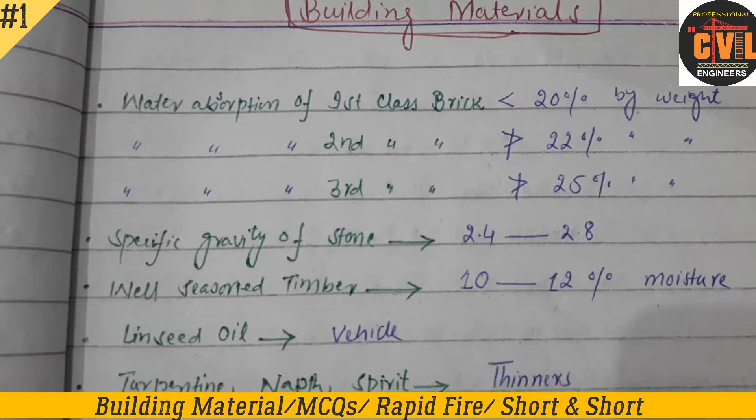I am Engineer Shamsur Rahman, and today I will start the series of test preparation for the examination of Federal Public Service Commission, Punjab Public Service Commission, Khyber Pakhtunkhwa Public Service Commission, and Sindh Public Service Commission. Also important for NTS, ETEA, UTS, ATS.

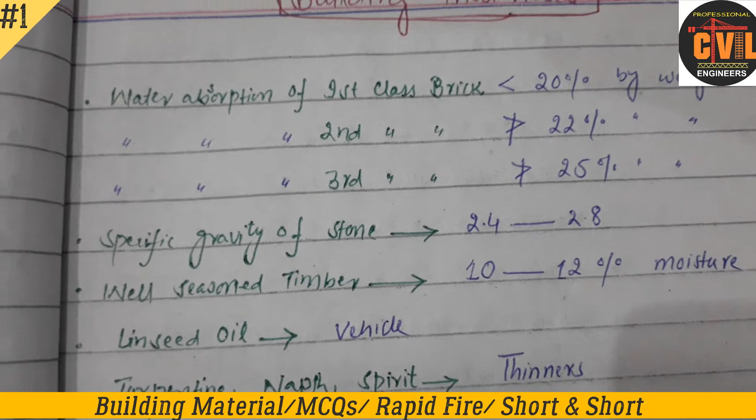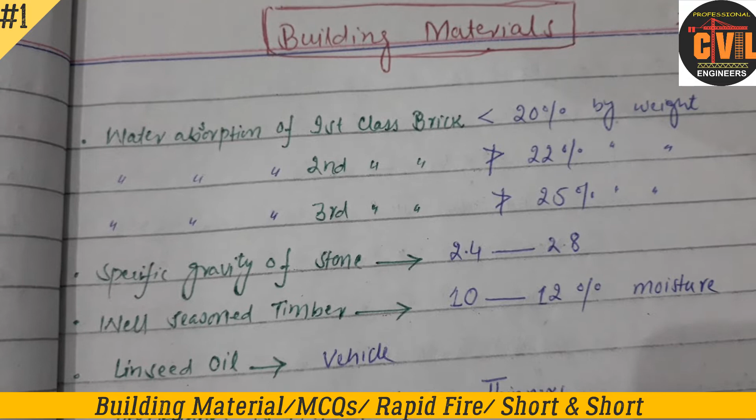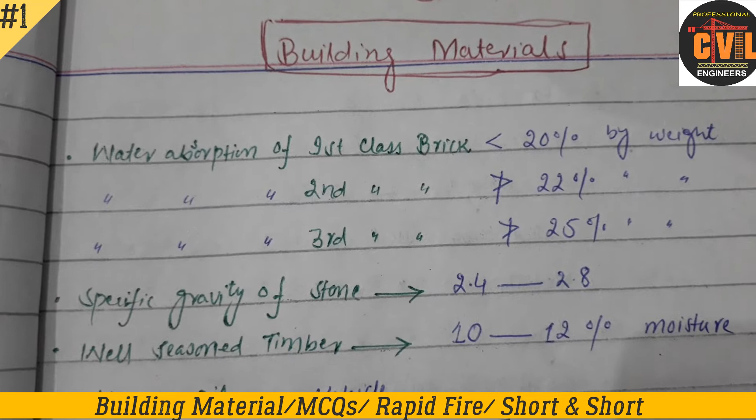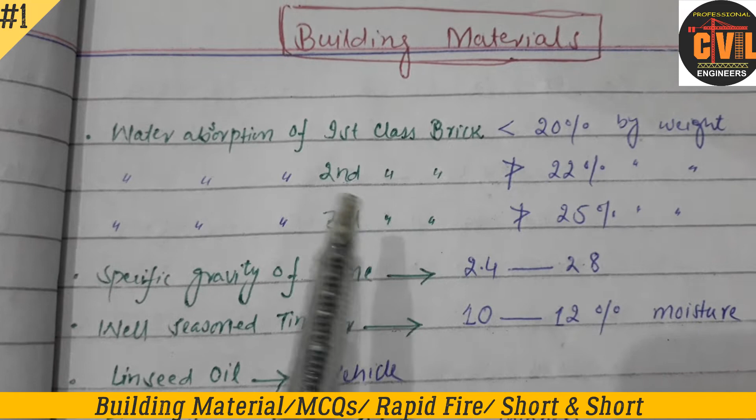Now, water absorption of first class brick should be less than 20% by weight. If you have MCQs asking how much water first class bricks will absorb, the answer is less than 20%. There are three types of bricks: first class, second class, and third class. In first class bricks, water absorption should be less than 20%. In second class bricks, water absorption should not be more than 22%. In third class bricks, water absorption should not be more than 25%.

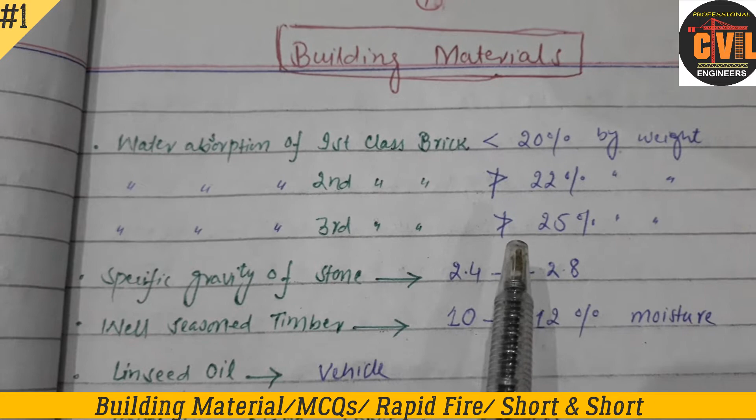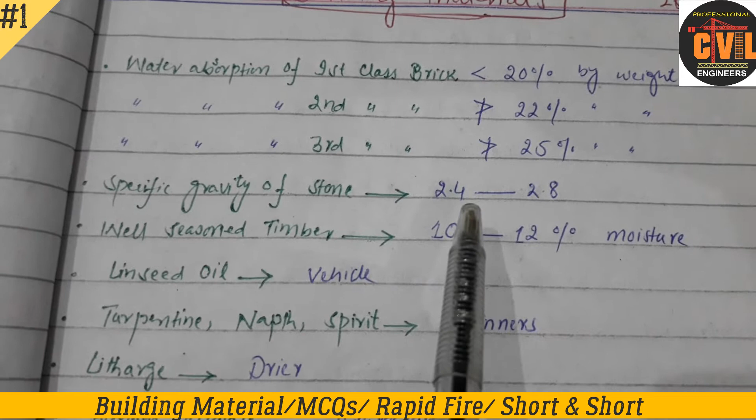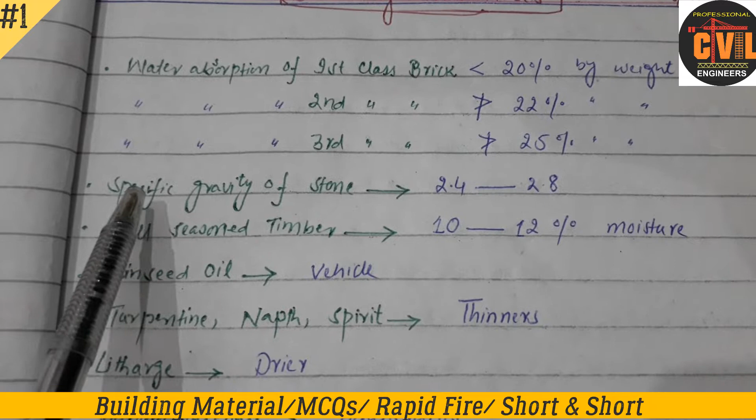Now, specific gravity of stone should be between 2.4 to 2.8. What is specific gravity? Specific gravity is the unit weight of any material divided by the unit weight of water. So specific gravity of good stone would be between 2.4 and 2.8.

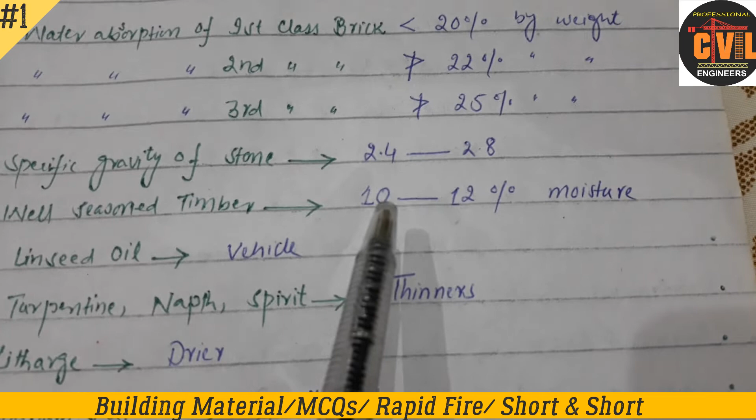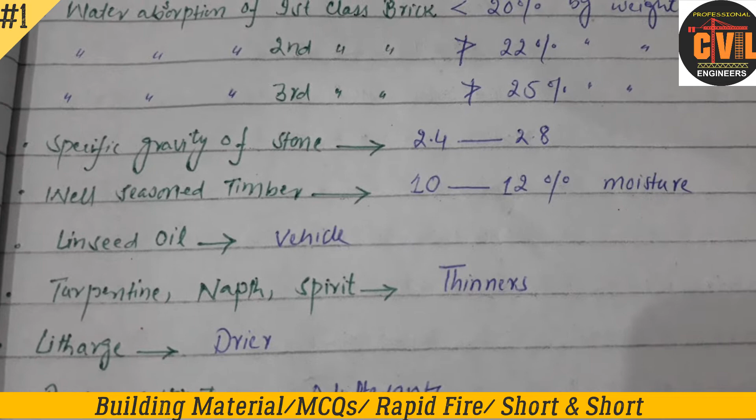Well seasoned timber should have moisture between 10% to 12%. What is seasoning of timber? Seasoning of timber is to remove the moisture from the tree, and if moisture is in the range of 10 to 12%, then it is called well seasoned timber.

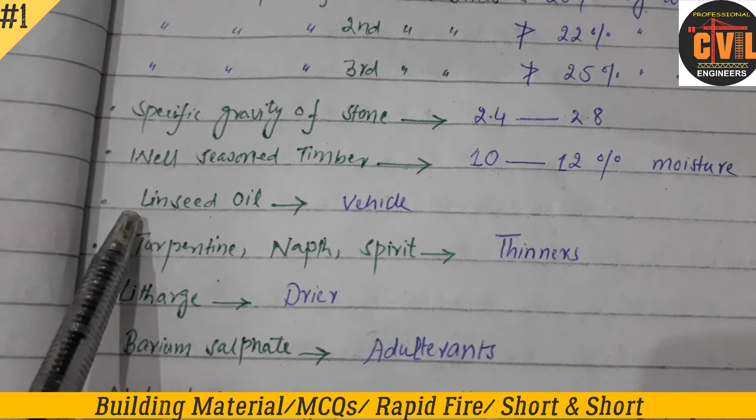In other MCQs you may be asked what linseed oil is - is it vehicle, thinner, dryer, or adulterant? Then you may be asked about turpentine, naphtha, spirit - these are thinners. I will explain what is vehicle, what is thinner, what is dryer, and what is adulterant. Litharge is a dryer, barium sulfate is an adulterant.

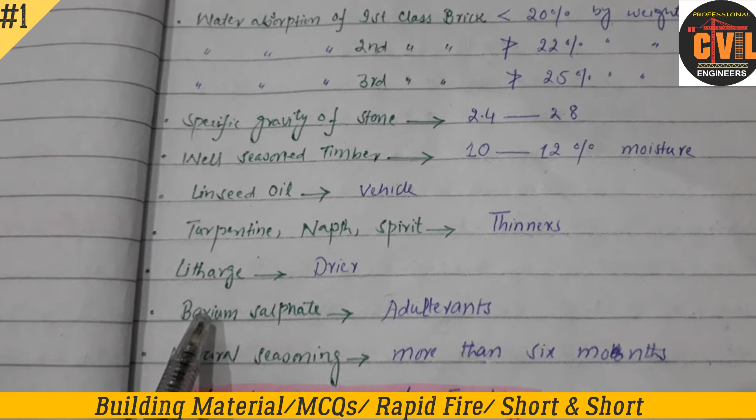Now I will explain what vehicle is. Vehicle is an oily liquid in which the base pigments of paint are soluble. It facilitates the paint to be conveniently spread over the surface by means of a brush.

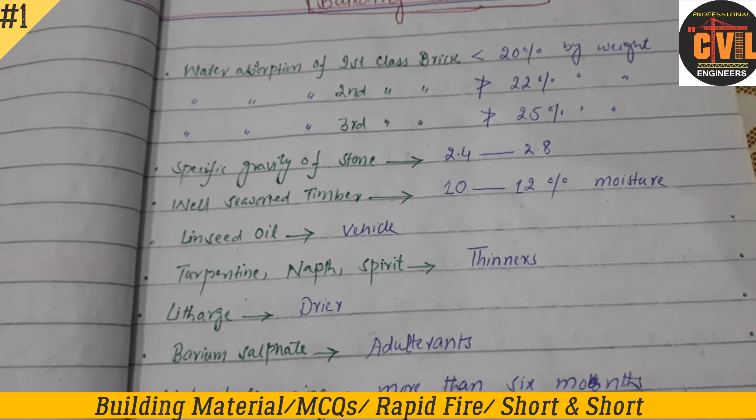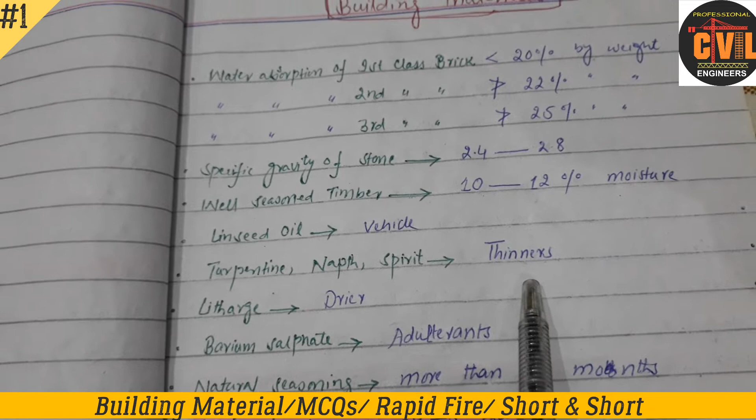Now, what is solvent or thinner? It increases the fluidity of paint to the desired consistency, to make it work more smoothly. Vehicle dissolves the base material of the paint, while thinners just give it fluidity.

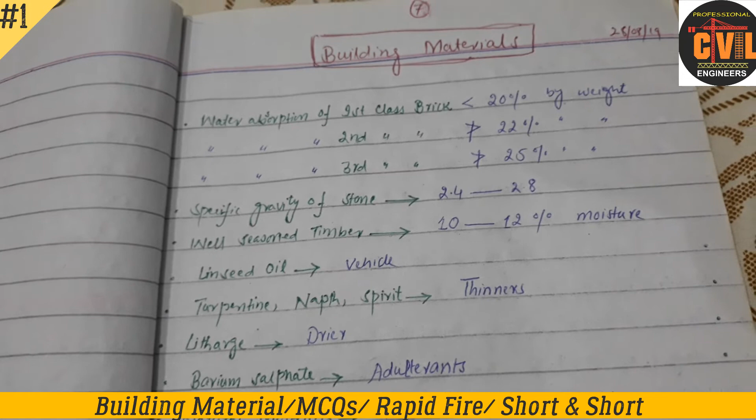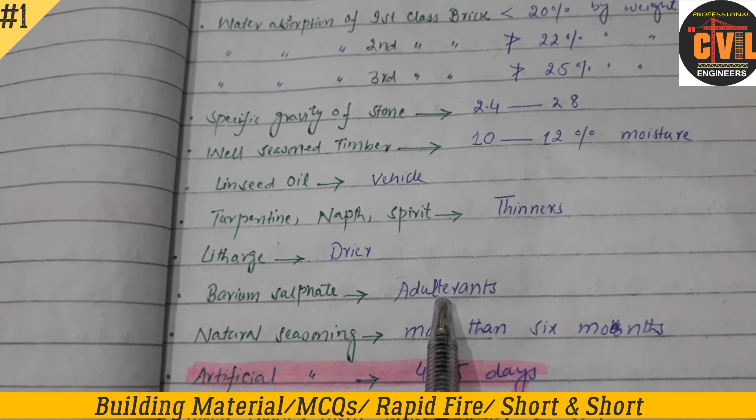What is dryer? Dryer is added to paint to quicken the drying of the vehicle - it reduces the time period of drying of the paint. And adulterants are materials which, when mixed with the paint, replace the base in part, thus reducing the cost of paint.

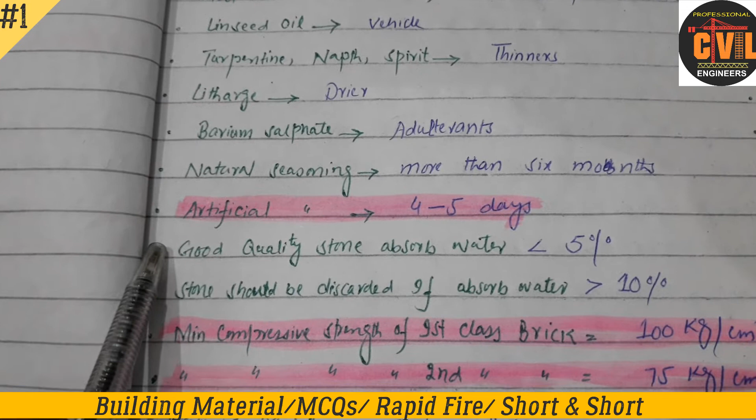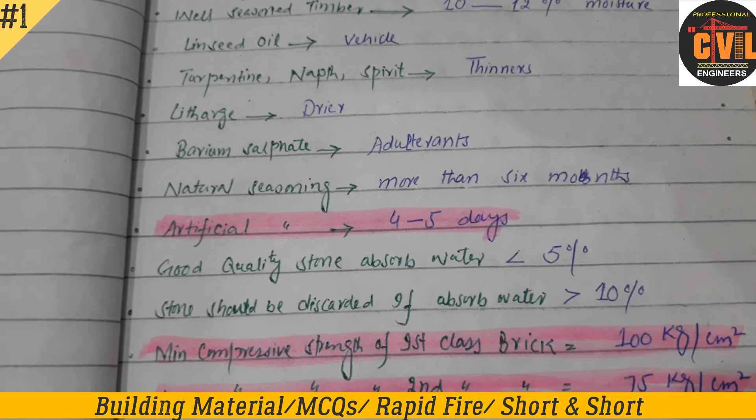As I discussed before, seasoning is to remove the sap or moisture from the fresh fallen tree. There are two types of seasoning: natural seasoning and artificial seasoning. In natural seasoning, you put the timber in shade and let the process happen naturally, which takes more than 6 months.

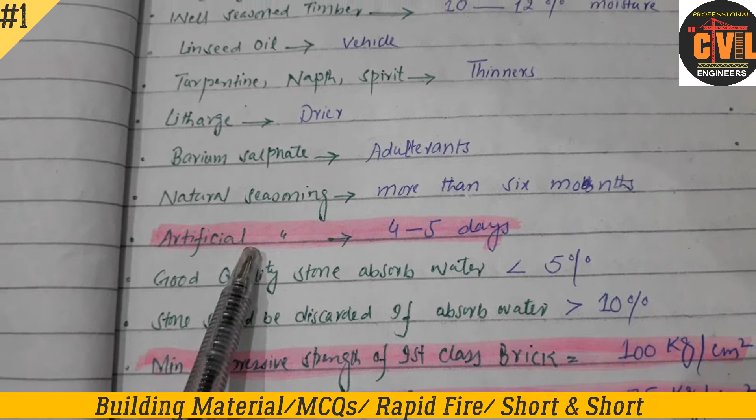In artificial seasoning, you make it by machines, so in this way you can get the seasoning done in 4 to 5 days.

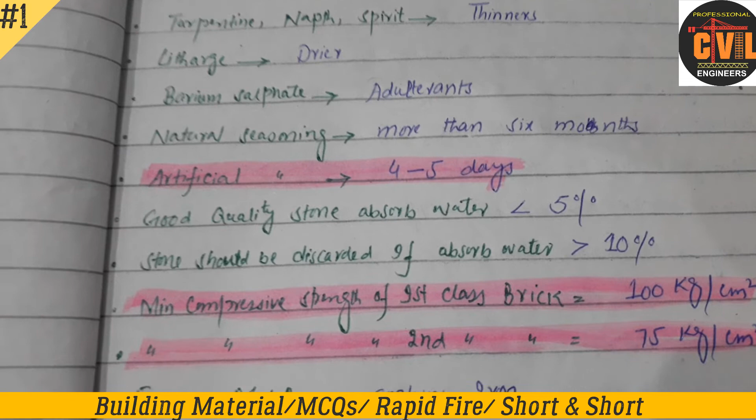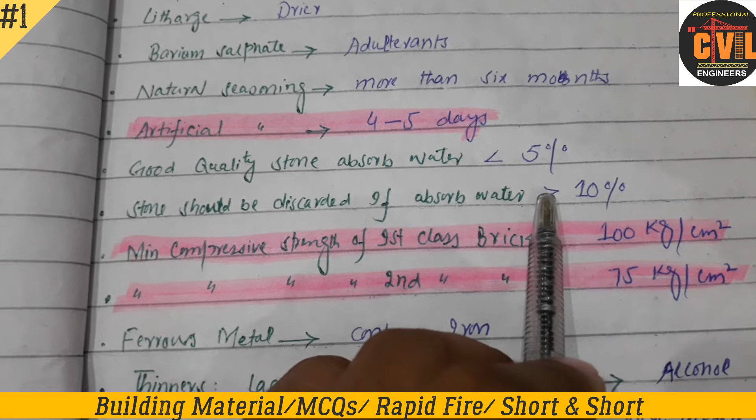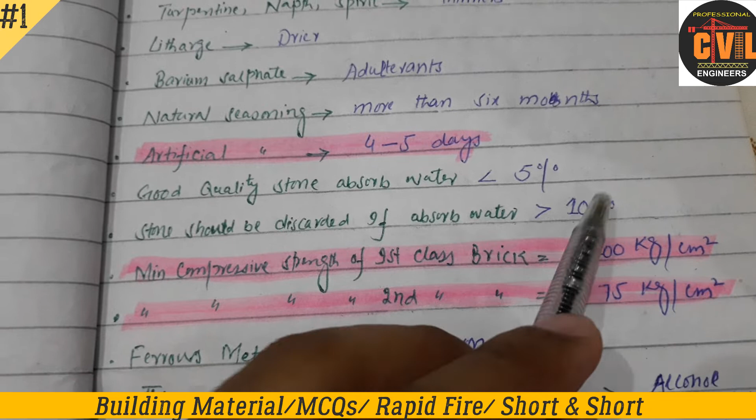Now they can ask you what good quality stone absorbs - how much water. The answer is less than 5%. If it has more than 5% but less than 10%, you can still use this stone. But if the water absorption is more than 10%, then you should discard this stone.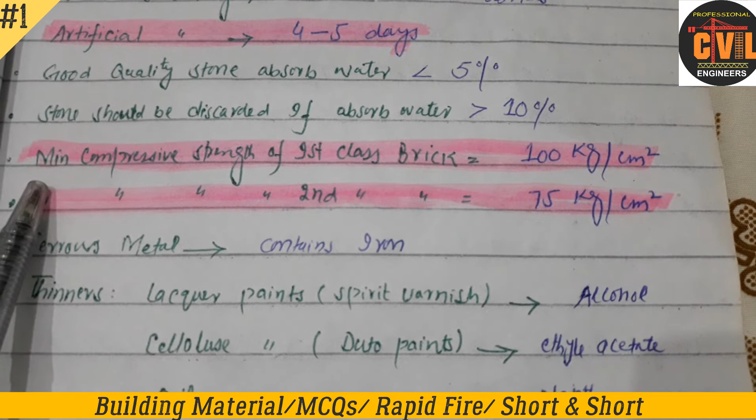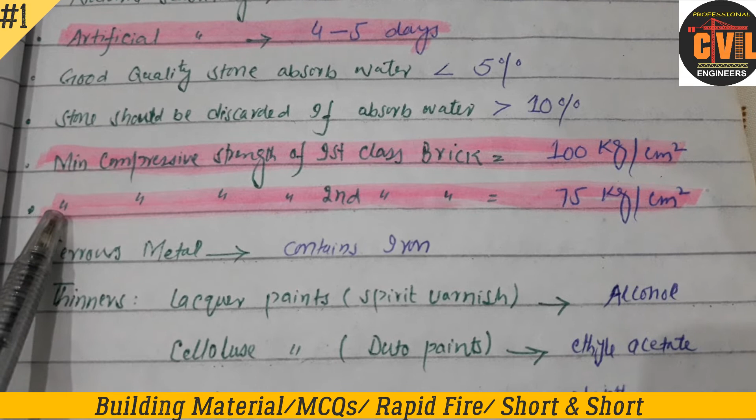Minimum compressive strength of first class bricks - as I told you there are three classes of bricks: first class, second class, and third class. Minimum compressive strength for first class brick is 100 kg per centimeter square, for second class brick it is 75 kg per centimeter square, and for third class brick it is 35 kg per centimeter square.

Okay, ferrous metals. What is ferrous metals? These are the metals which contain iron.

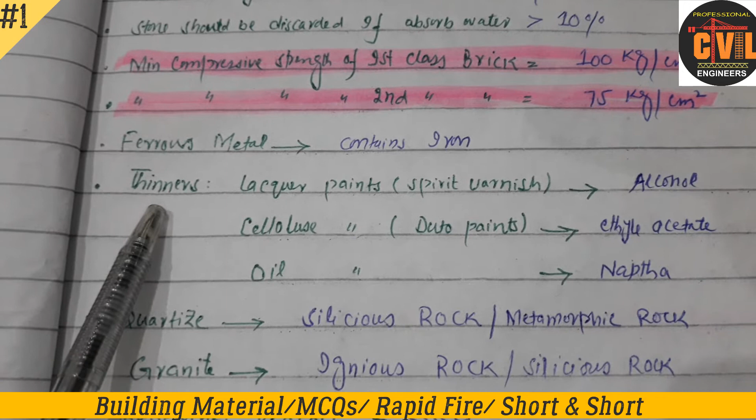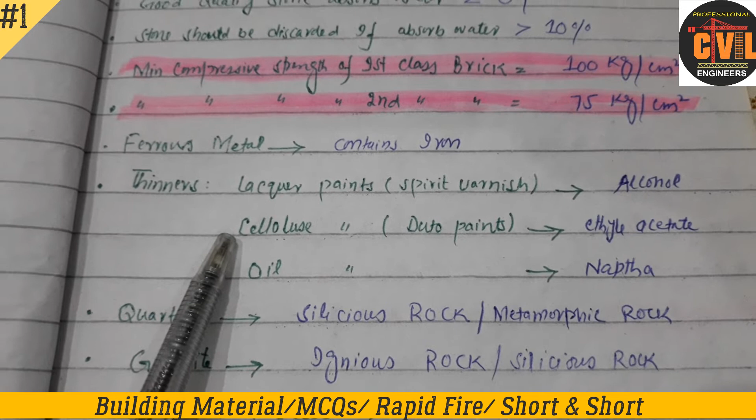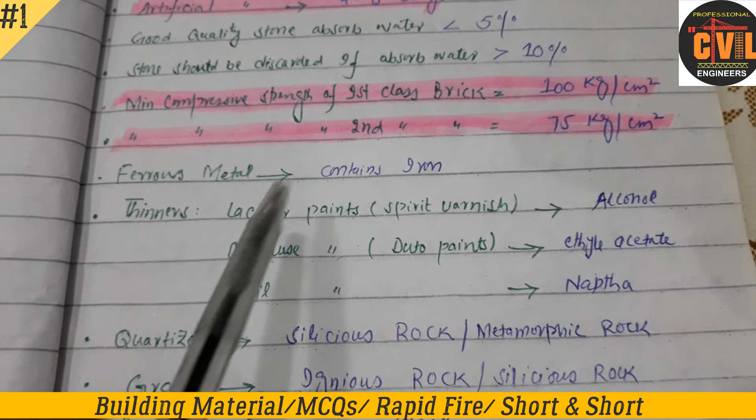Now thinners. There are types of paints: one is lacquer paint, also called spirit varnish, the other is cellulose paint, and the third one is oil paint. In lacquer paint the thinner would be alcohol, in cellulose paint the thinner would be ethyl acetate, and in oil paint the thinner would be naphtha.

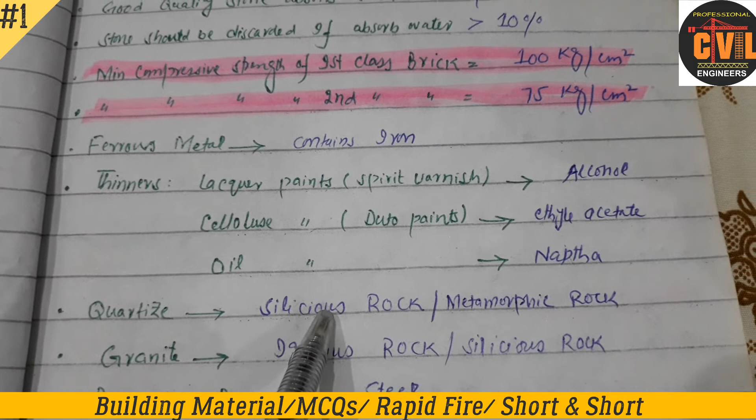Now quartzite. This is a type of rock, also called siliceous rock. And geologically it is called metamorphic rock.

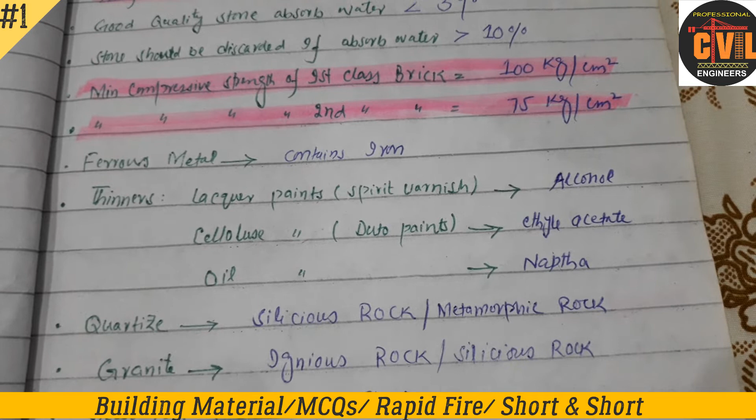Granite is a type of igneous rock, also a type of siliceous rock.

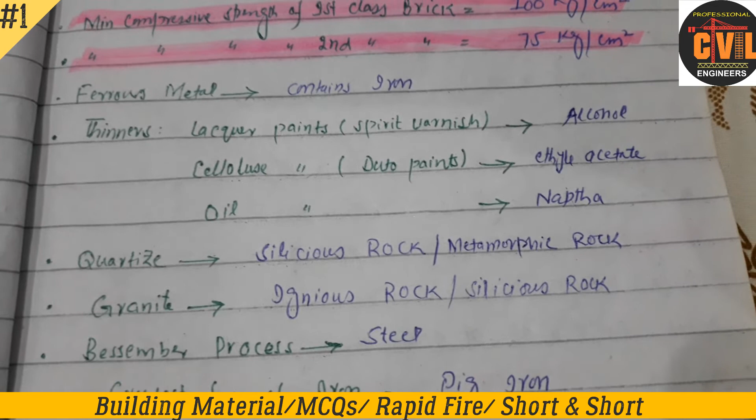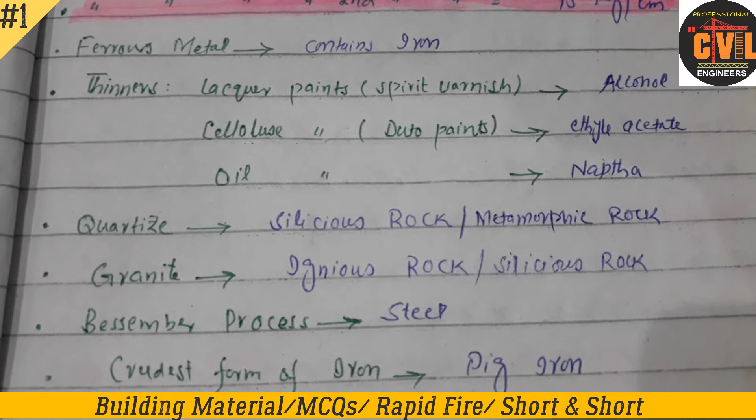Maybe you know about the types of rocks. Geologically there are three types of rocks: one is sedimentary rocks, the second is metamorphic rocks, and the third is igneous rocks. And chemically there are also three types: one is siliceous rocks, the other is argillaceous rocks, and the third is calcareous rocks.

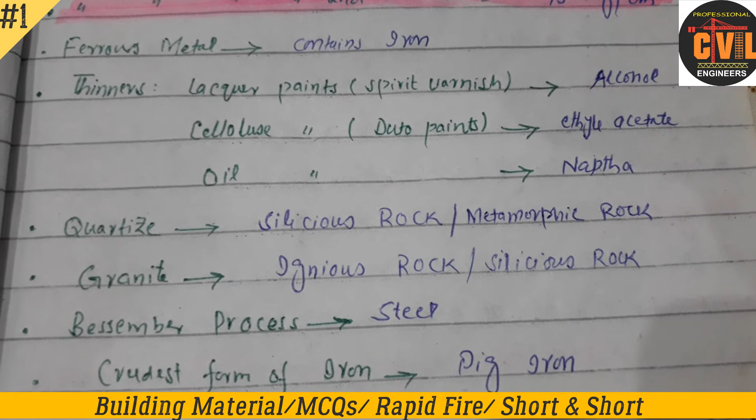So quartz and granite, these are chemically called siliceous rocks. But geologically quartz is metamorphic rock and granite is igneous rock.

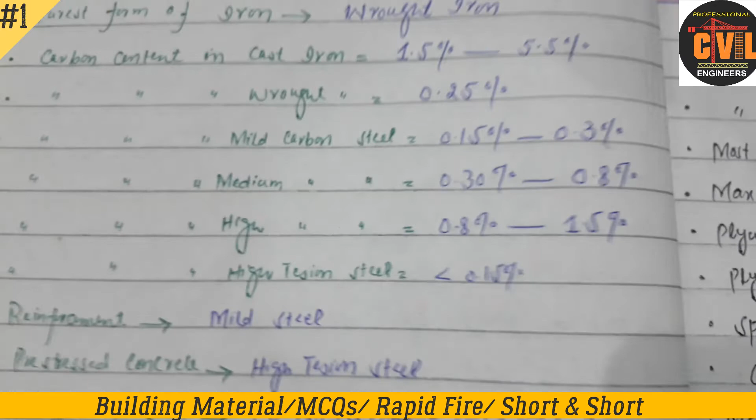Bessemer process. Steel is prepared by the Bessemer process. Crudest form of iron was pig iron, but the purest form of iron is wrought iron.

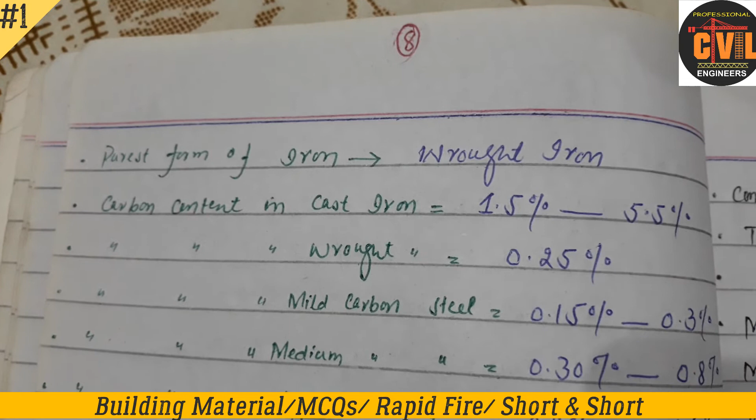In interviews or papers, more questions would come like this: what is the crudest form of iron, what is the purest form of iron? Now these are also important.

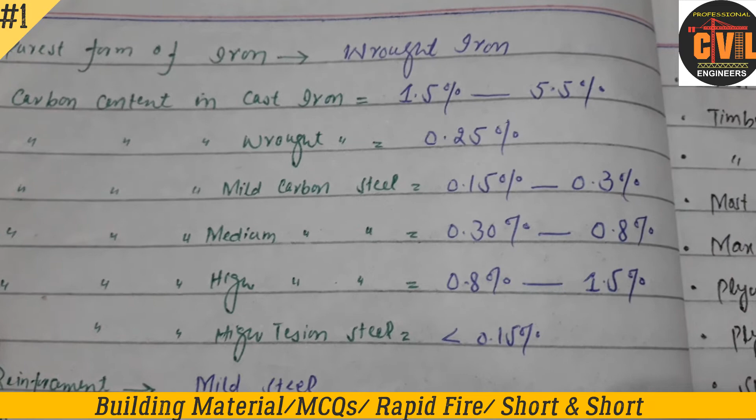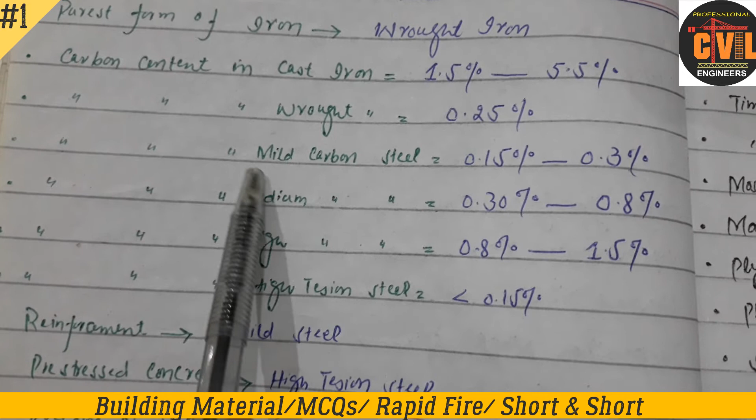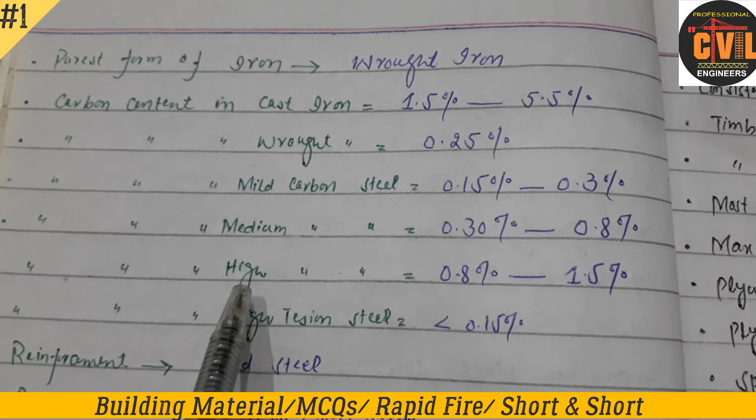Carbon content in cast iron is in the range of 1.5% to 5.5%, and carbon content in wrought iron should be up to 0.25%. Carbon content in mild carbon steel is 0.15 to 0.3%, in medium carbon steel it is 0.3 to 0.8%, and in high carbon steel it is 0.8% to 1.5%. And in higher tension steel, the carbon content would be less than 0.15%.

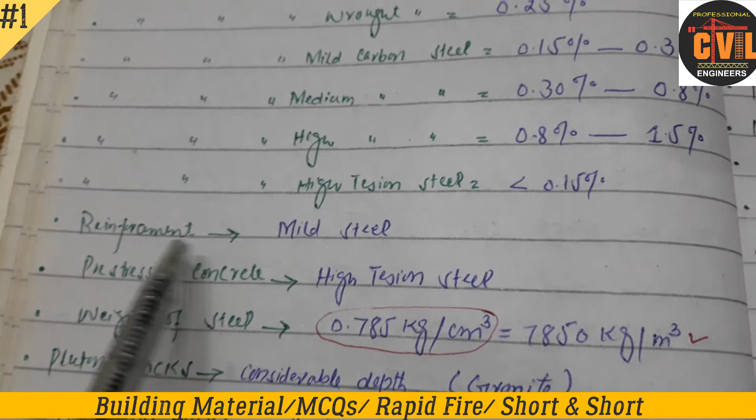Reinforcement is which type of steel? It is mild steel. Pre-stressed concrete, which type of steel do we use in pre-stressed concrete? So it is high tension steel.

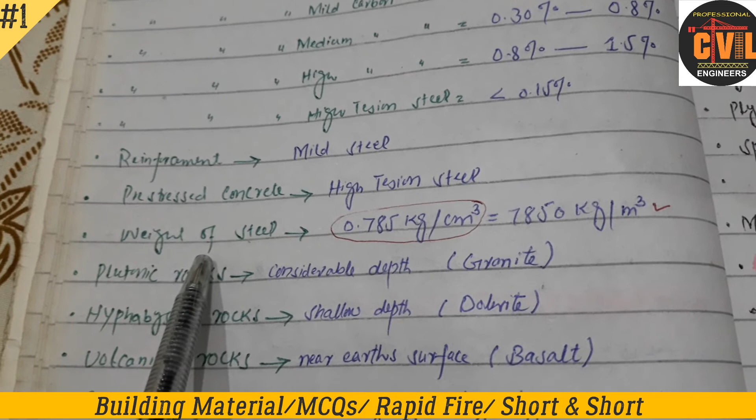Weight of steel: unit weight of steel or density of steel is 7850 kg per meter cube.

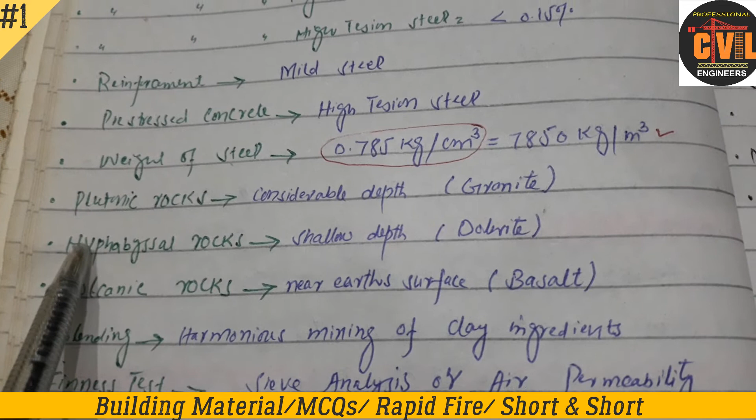Now, plutonic rocks, hypabyssal rocks, volcanic rocks - these three are the types of igneous rock.

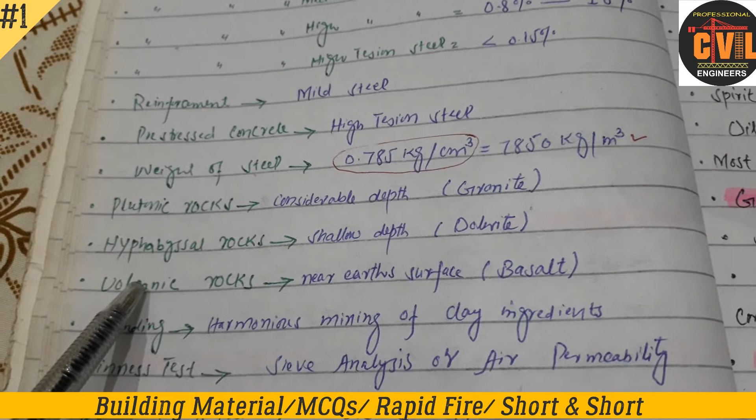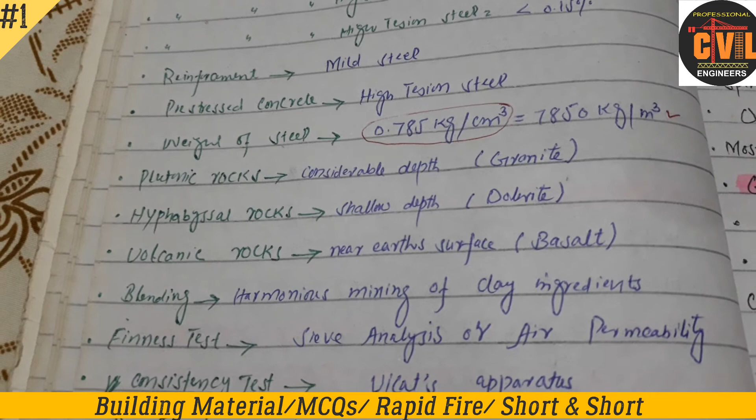The igneous rock which has molten magma at considerable depth, at higher depth, is called plutonic rocks. If this rock is at shallow depth, then it would be called hypabyssal rock. But if it is at the earth's surface, then it would be called volcanic rocks.

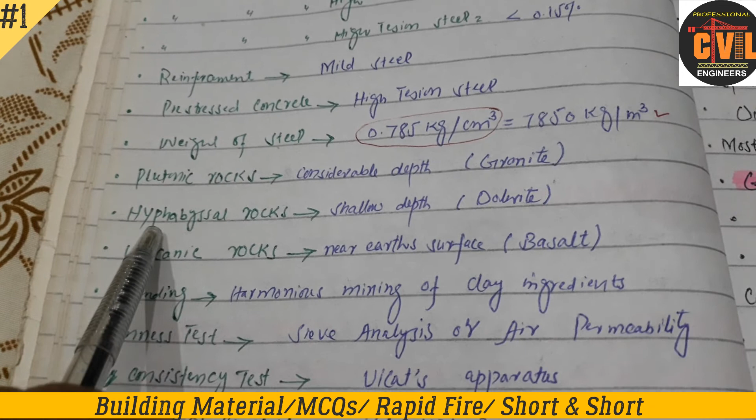Granite is the type of plutonic rocks. Dolerite is the type of hypabyssal rock, and basalt is the type of volcanic rocks.

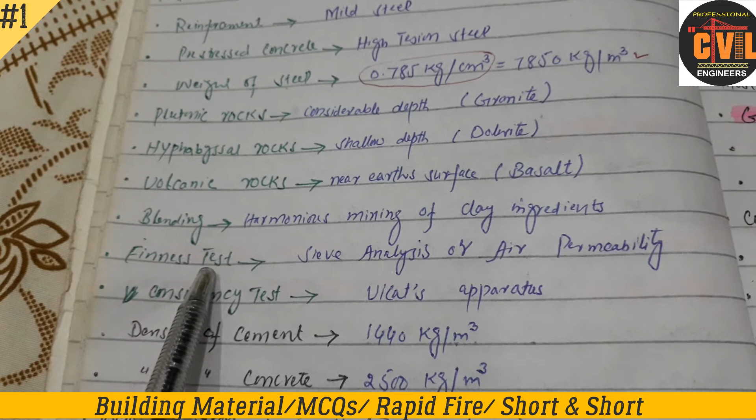Now, what is blending? This is harmonious mixing of clay ingredients. Fineness test - by how many methods can we find the fineness test? So this we can find by two methods: one is sieve analysis and the other is air permeability.

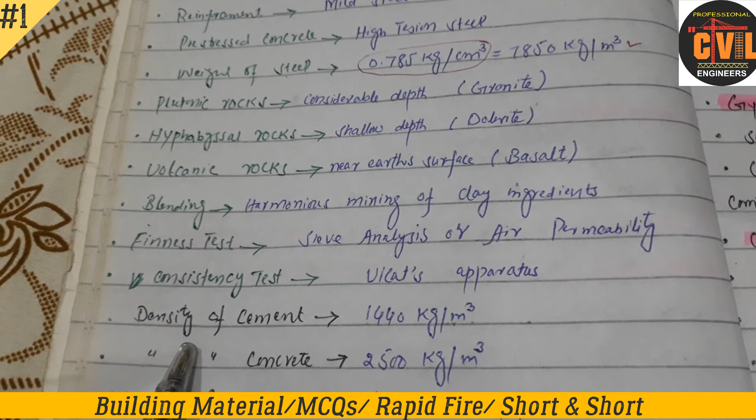Consistency test of cement: this we are conducting by Vicat apparatus. Density of cement is 1440 kg per meter cube, and that of concrete is 2500 kg per meter cube.

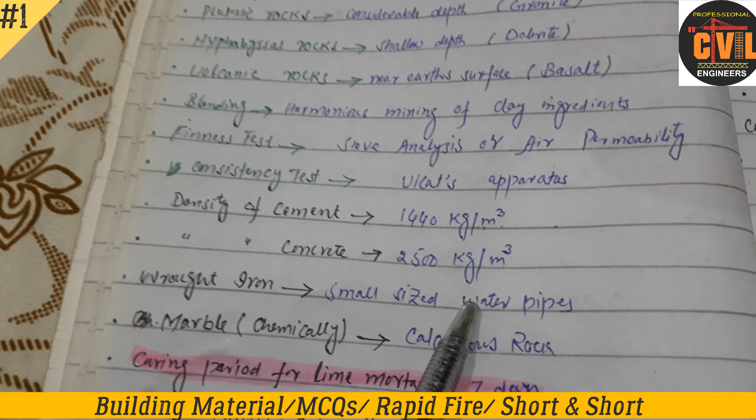Wrought iron - these are used for small sized water pipes.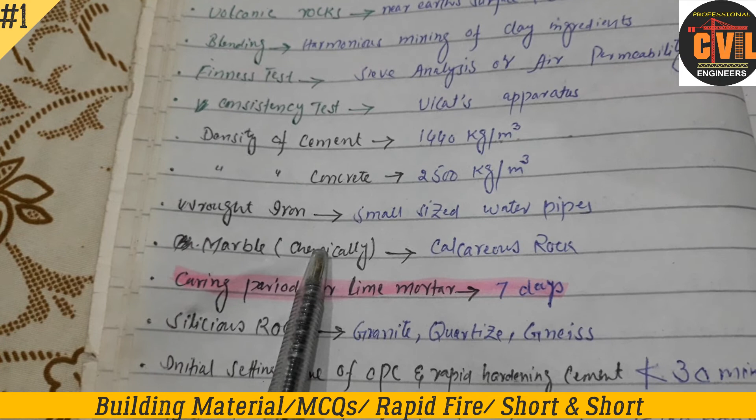Marble is chemically called calcareous rock, and the curing period for lime mortar is 7 days. Also for OPC cement or for concrete it is 7 days. But if there are some admixtures, then this curing period would be 10 days.

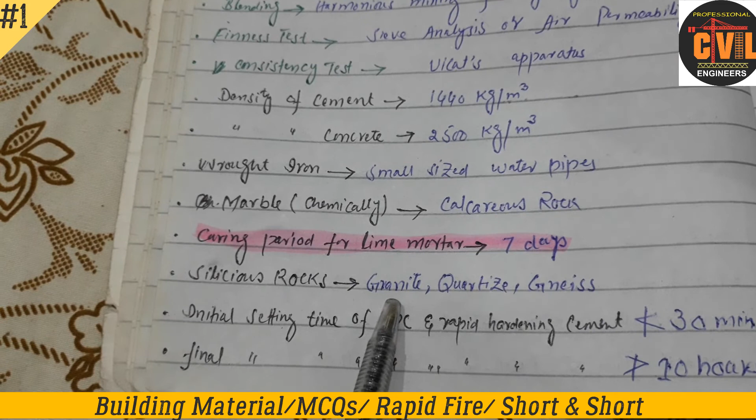Siliceous rocks, which I told you before - granite, quartzite and gneiss - these are the types of siliceous rocks.

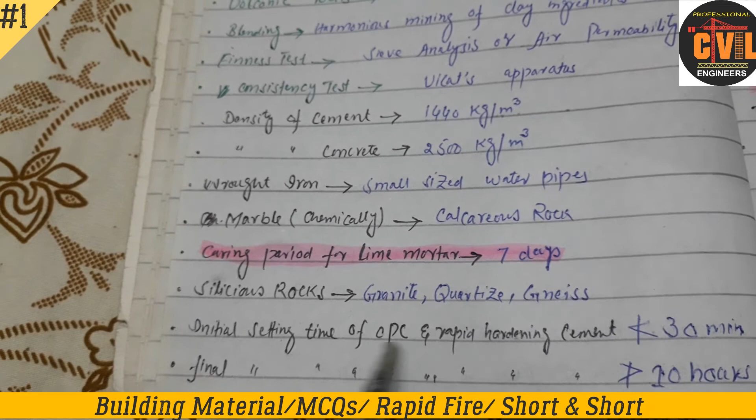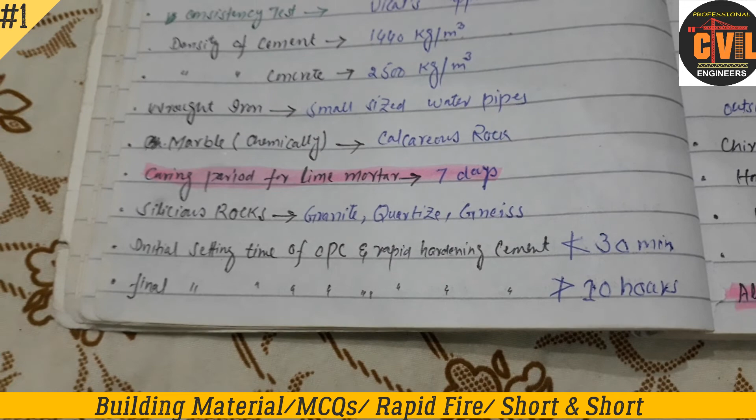Initial setting time of OPC, that is important. For OPC and rapid hardening cement it should not be less than 30 minutes, and this is the same for both OPC and rapid hardening cement. And the final setting time of OPC should not be more than 10 hours.

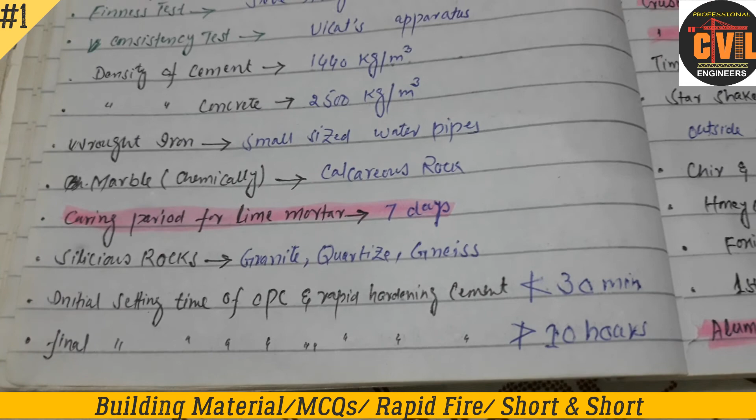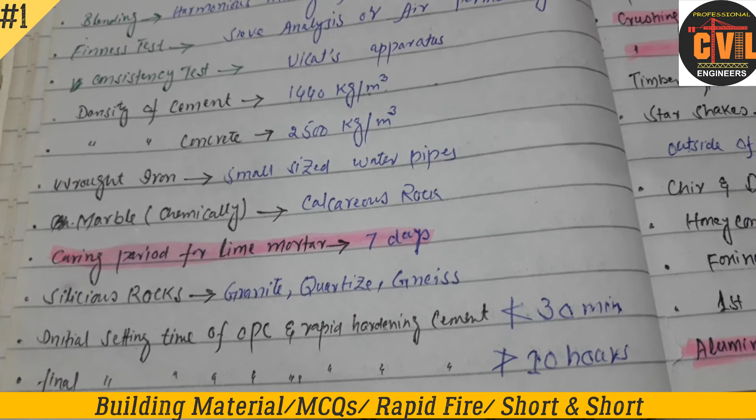So I think for today it's enough. In this building material subject, we would study in parts - part 1, part 2, part 3 and so on.

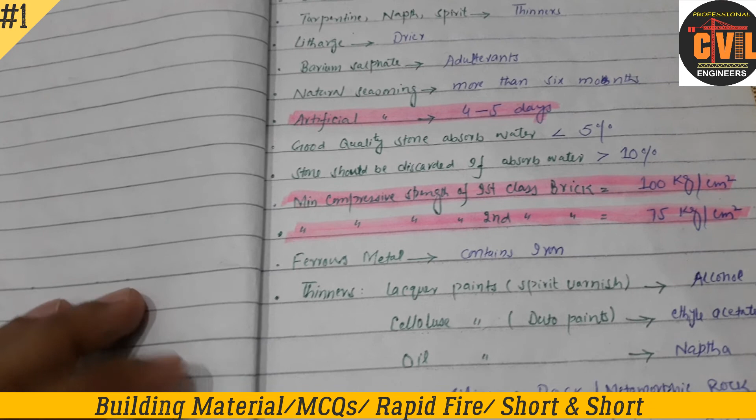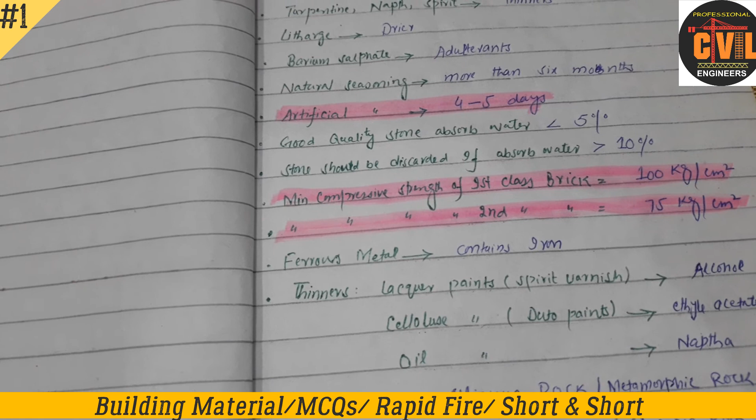I hope that today's lecture would be more beneficial for you, and you have learned more terminologies, more technical things in less time. Because for test preparation you haven't got more time to go through many books and many definitions. So here I am discussing these terms in a short time, and like this you would remember them for all time.